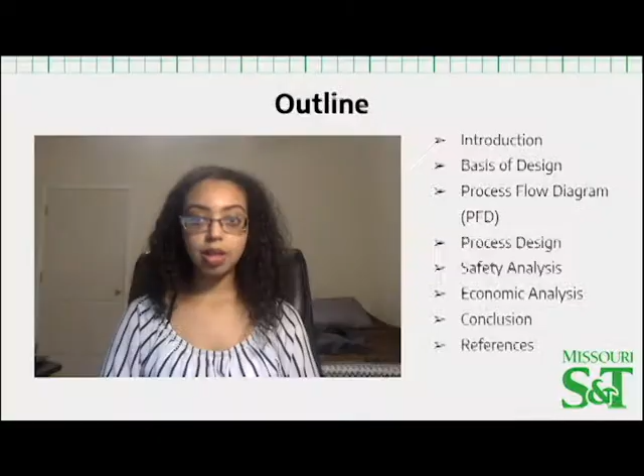We are Team Bread. My name is Roba El Sheikh, the project manager. I'm accompanied by Amati Pute, the design specialist, Andrew Brewer, the financial analyst, and Brandon Drew, the safety officer. And today we're going to present our styrene production. This presentation will cover Bread's proposal for a feasible, profitable, and safe production of manufacturing styrene. Here is an outline of what we will be covering during this presentation.

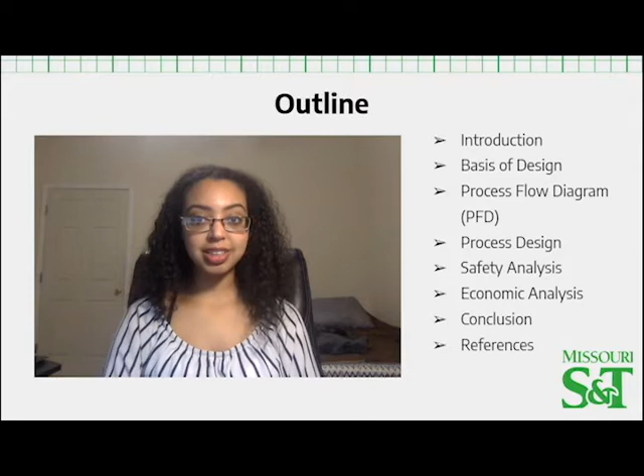Styrene is commonly known for being used to manufacture latex, synthetic rubber, and polystyrene resins. The global market for styrene has significantly risen due to the growth of packaging and construction industries. The SRK thermodynamic property method was selected to successfully carry out the simulation on Aspen. By the dehydrogenation of ethylbenzene using a large quantity of steam at a high temperature and low pressure, we were successfully able to achieve a production rate of 113,000 tons per year and a 98.7% styrene purity.

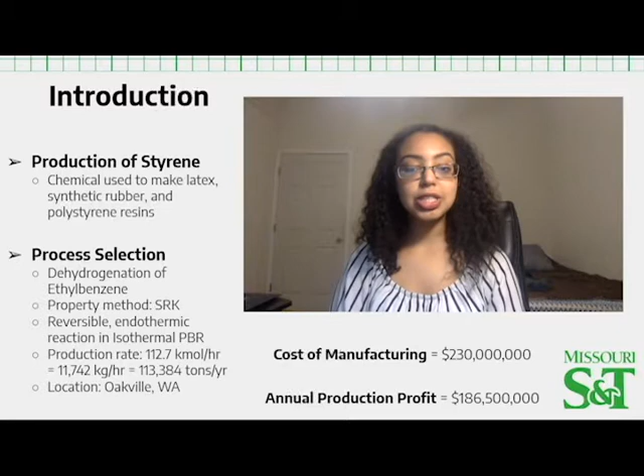The plant's location is based in Oakville, Washington. The cost of manufacturing is $230 million with an annual production profit of $186.5 million with a 0.6-year plant payback.

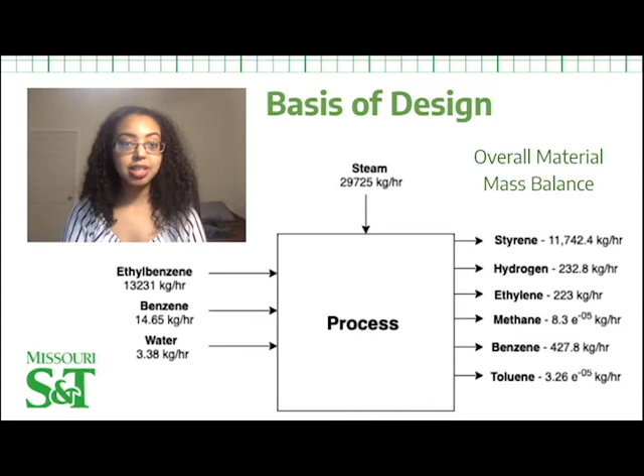Shown here is the overall material mass balance. Ethylbenzene, benzene, and water are fed into the process and mixed with superheated steam. The steam to ethylbenzene ratio is 13:1, enough to achieve a heated reaction to produce styrene and its byproducts. The values were obtained from the outlet streams of the three-phase separator, distillation tower 1, and distillation tower 2. And the products that are being produced and sold are styrene, and with further distillation, we can sell hydrogen, ethylene, and benzene.

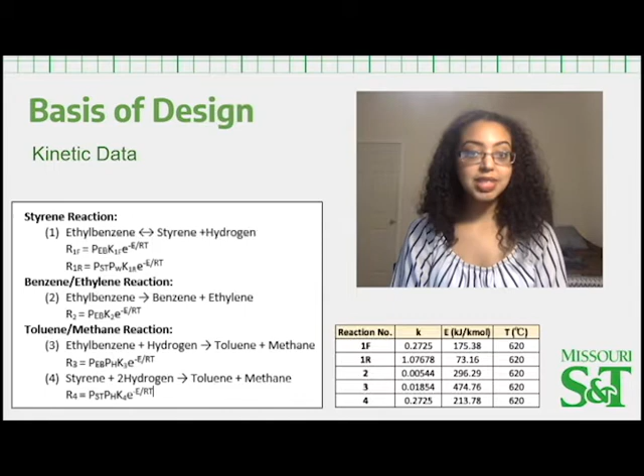This is the kinetic data used in Aspen to achieve the reaction in the reactor. The two important principles of thermodynamics were considered, which are chemical equilibrium and chemical kinetics. The equilibrium constant determines how far the reaction can possibly proceed given sufficient time for equilibrium to be reached, while the chemical kinetics determine at what rate the reaction will proceed towards the maximum extent. These values were obtained from a styrene research paper and verified on Polymath.

The advantages of using steam are, one, it can provide the heat to maintain the reaction temperature, and two, it shifts the equilibrium conversion to a higher value by diluting the mixture and decreasing the partial pressures of ethylbenzene and hydrogen. The required energy of reaction is supplied from latent energy of injected superheated steam. Thus, the reaction taking place causes a decrease in the temperature of the bed and, subsequently, the conversion of ethylbenzene is decreased. The exit stream of the reactor is hot and gets cooled through multiple exchangers.

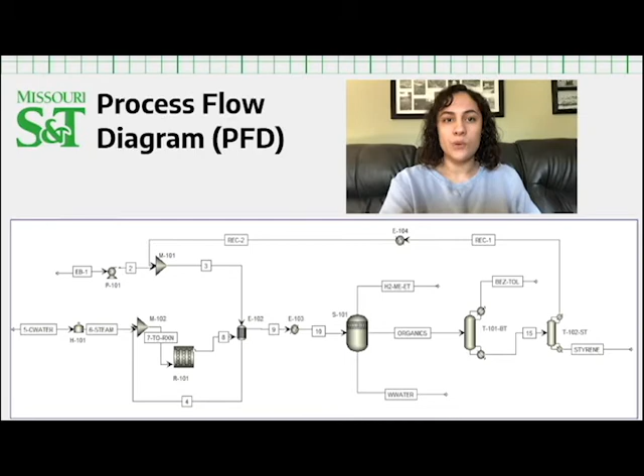Now let's get into our process design specifications. The RPlug reactor used in Aspen is the best choice to simulate plug flow configuration with the composition changing along the reactor length or catalyst mass, since it allows the full definition of kinetics and hence the prediction of reactor output under widely different conditions. The catalyst we used is iron oxide. You'll see that there's a very small amount of toluene and styrene entering the reactor. This is due to trace amounts remaining in the recycle stream.

For the distillation columns, the model we used in Aspen was RadFrac. They have a partial vapor condenser and a kettle reboiler. To determine the stages, we had Aspen output a reflux ratio over a range of theoretical stages. We multiplied the theoretical stages by these reflux ratios and graphed them over theoretical stages to find the minimum value, which we then used for the selected stage. For T101, this was 16, and for T102, it was 88.

Our feed location should ideally be around half the number of stages. We increased it slightly to ensure a good separation. We used this method to balance economic feasibility and efficiency of the towers. The reflux ratio and distillate to feed ratio were both obtained in Aspen. For the separator, we used the Flash3 model in Aspen.

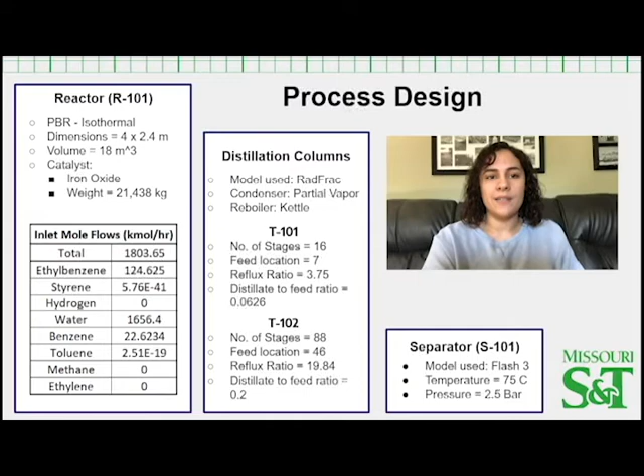For the safety aspect of our plant, we first looked at the materials that we would be working with. It was found that most of our materials were toxic and flammable. This put a large emphasis on the importance of containment for our materials, for a leak could cause environmental harm and/or an explosion. This is the main concern for our plant.

We also see, while looking at the reactivity worksheet, that there is a complication of mixing ethylene, hydrogen, and our styrene monomer. It is said that these together will most likely polymerize and cause a rapid gaseous mixture that may lead to overpressurization and a possible pipe or equipment rupture. Since this is in direct correlation to a containment problem, it heavily influenced the valves and controls of our P&ID.

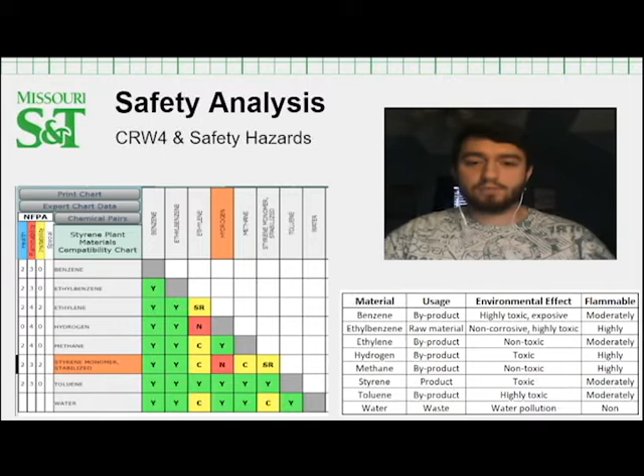Moving on to the reactor HAZOP and P&ID. The HAZOP was based on a risk ranking scale of 1 to 3 by using a matrix between likelihood and severity ranging from 1 to 5 and were summed. Sums of 1 to 5 were ranked as 1, 6 to 7 were ranked as 2, and 8 to 10 were ranked as 3. Where 1 was represented by green and required no action, 2 was represented by yellow and an action was considered, and 3 was represented by red and an action was required.

Some of the required and considered actions consisted of a high flow which could lead to a loss of containment, and this was mitigated by flow sensors. We could also have a high pressure in the reactor which could lead to overpressurization and an explosion, and this was mitigated by a pressure relief valve to a flare. We could also have low pressure in the reactor, possibly causing an implosion, and this was mitigated by a pressure sensor.

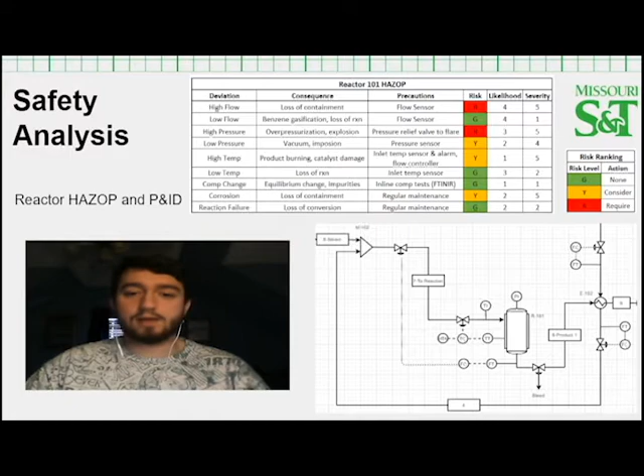We could also have a high temp leading to a burning of product and damaging the catalyst, and this was mitigated by an inlet temperature sensor, flow controller, and a high temp alarm. And lastly, corrosion, which could lead to a loss of containment, and it can be mitigated by regular maintenance.

Moving on to the separators and towers. The same problem would occur for each of the 3 pieces of equipment, such as high pressure in the gas line, which could cause pipe rupture. This was mitigated by a pressure relief valve. We also have corrosion, which could lead to loss of containment, but would be mitigated by regular maintenance, which would also take care of the possibility of equipment failure. Lastly, we considered the possibility of a lack of flow, or flooding of the separator and towers. This was mitigated by adding a level controller.

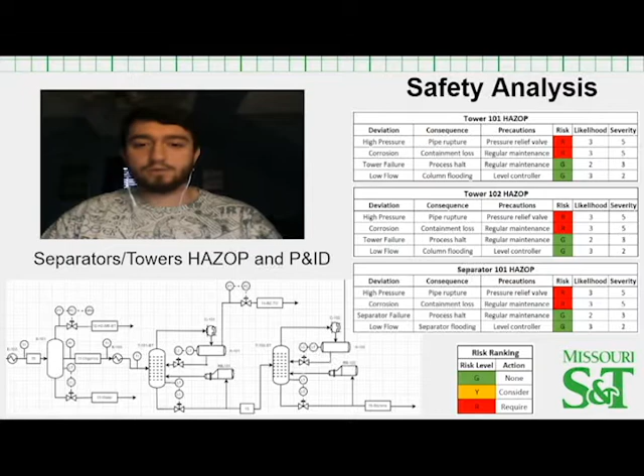Our group chose Oakville, Washington for our location due to its ease of access to the coast. This makes it much easier to bring in our raw product from our Chinese suppliers. Now, for some land specifics, the piece of land we settled for was 6.6 acres and $65,000 with direct river access. This is relatively cheap, especially considering the river access and the conveniences that would bring us for transportation.

Not only do we have this convenience though, but in Washington, they utilize a gross receipts tax instead of a typical income tax. The gross receipts tax actually taxes you based on the gross revenue at a smaller percentage as opposed to the net income like a normal income tax. This can pose a problem for startup businesses that aren't bringing in a lot of net profits, but is a huge boost for our facility due to our large net profits.

This next slide shows an analysis of our fixed capital investment costs. This is a snippet from our cap cost sheet that was used to estimate our equipment costs. Here you can see we have 4 main contributors, each being over $1 million.

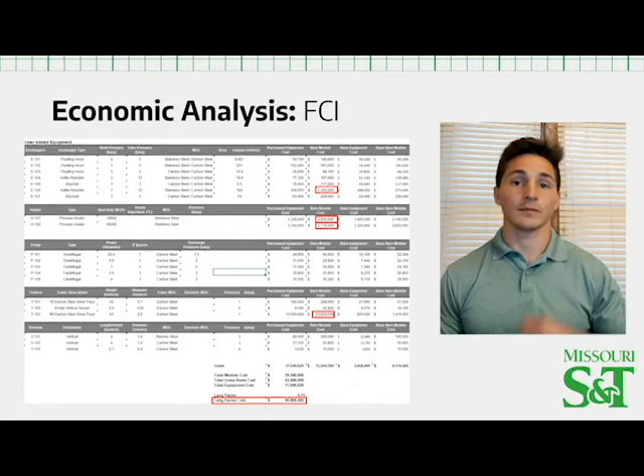They include our 2 process heaters, 1 of our distillation towers, and a reboiler that comes right off our main distillation tower. This all adds up to about $80.8 million per year. Now for our utility costs, you can see we also have three main contributors, being one of our heat exchangers and two of our process heaters, and it all equates to about $4.1 million per year.

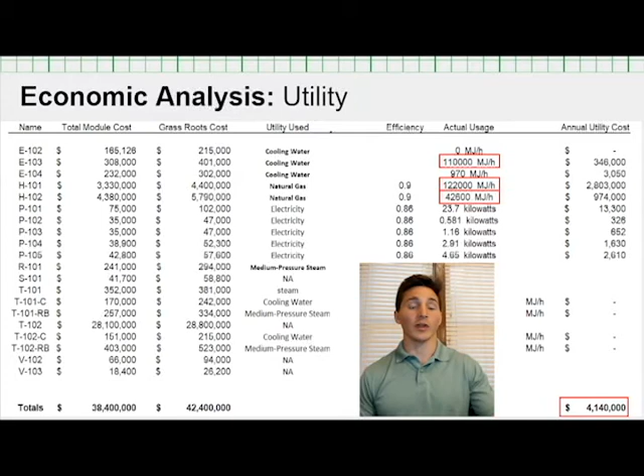Now for the total analysis, starting with a fixed capital investment was shown at $80.8 million, and then we have our labor costs, which is just under $1 million, and these are based on the number of units that would require operators to monitor them, and an operator's salary for $62,000 per year. The raw material cost was about $168 million a year, and it makes up our ethyl benzene costs from our Chinese suppliers, along with the city water costs in order to produce steam.

And next we have utility costs of about $4.1 million, which was shown in the previous slide as well. And lastly, we have our wastewater costs of about $13,000. This is the cost for purifying the water that comes in direct contact with our process fluids to purify some of the organics. This all equates to about $230 million per year for our cost of manufacturing without depreciation.

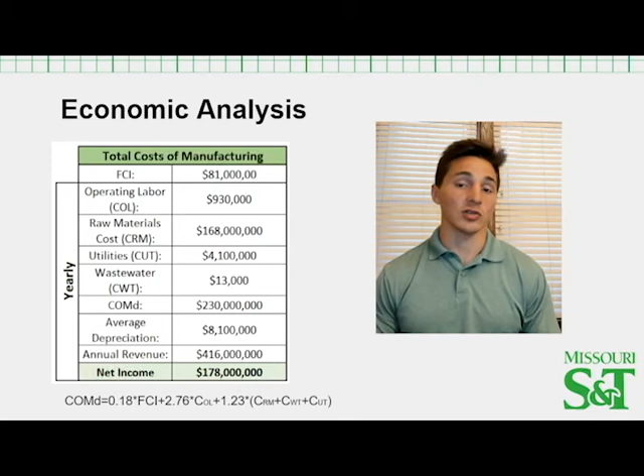And if you include an average depreciation of $8.1 million over 10 years and an annual revenue of $416 million, that brings us to a taxable net income of $178 million. This shows why we were glad to see a gross receipts tax instead of a typical income tax. However, our average cash flow is the net income plus the average depreciation, since you're not actually losing the money that's actually being depreciated for the equipment. So keep this in mind.

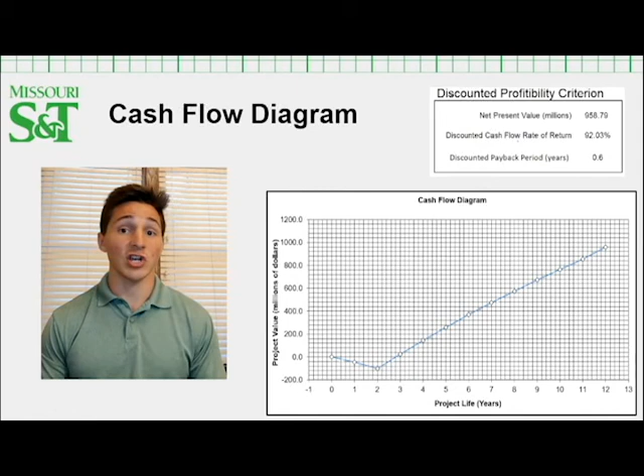Next, you can see our projected cash flow for the life of the project of 12 years. This includes a net present value of just under $1 billion, a discounted payback period of 0.6 years, and a discounted cash flow rate of return of just shy of 100%, all unheard of numbers for an investment of this magnitude.

However, we all know that investments do have some risk involved with them, so to account for some fluctuations, we use a Monte Carlo method for risk analysis. To account for some inaccuracies in the estimation of the capital cost, we used a negative 20 to a 30% fluctuation on fixed capital investment. For the price of the product, we decided that the styrene cost was relatively high at the moment due to certain circumstances, so we decided on a negative 20% to a 5% fluctuation based on some of my other conservative estimates, such as my byproducts making zero money.

We decided our working capital was about accurate, but we put a negative 5 to a 5% fluctuation based on some noise in the data. And then the income tax rate was scraping the bottom of where it could be, and the interest rates are also extremely low due to current circumstances, so we put each of them at 0 to 10% fluctuations on both of these rates. Now, the raw material pricing we used was negative 10% to a 10% fluctuation, just to account for the inherent noise in material costs from day to day.

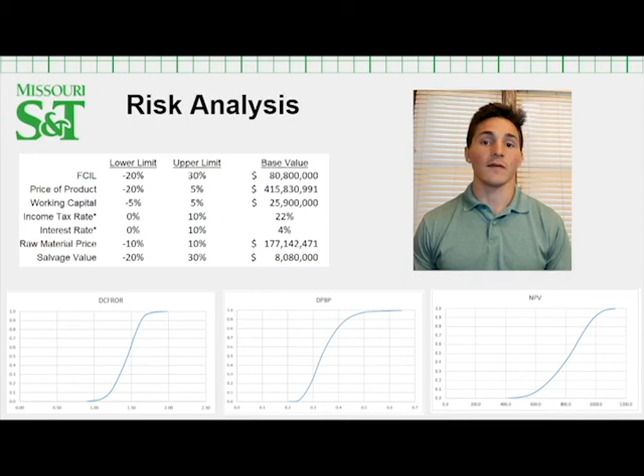And we decided that the salvage value would also be about the same value, or same range as the fixed capital investment. With all that being said, the net present value ended up ranging from about $400 million to about $1.1 billion. Our discounted cash flow rate of return was about 100% to 200%. And our discounted payback period was between 0.25 and 0.6 years. Again, all unheard of numbers. So it ended up being a very high rate of return and a very safe investment.

Through this presentation, Team Bread committed to ensure the best possible methods of operations to produce the most efficient styrene production design. Our team approached each step of the design carefully in preparation of presenting a safe and economical plant. Given the high demand of styrene-based products, an investment for Bread's design will allow for a 90% conversion and a 98.7% styrene purity, and an annual profit of $183.5 million with a 0.6 plant payback.

Our design is operated in the safest conditions based off our safety analysis, with a competitive operational pay rate to employees, and still are able to achieve a profitable profit margin at the end of the day. That is why we strongly recommend for you to invest and trust in Bread.